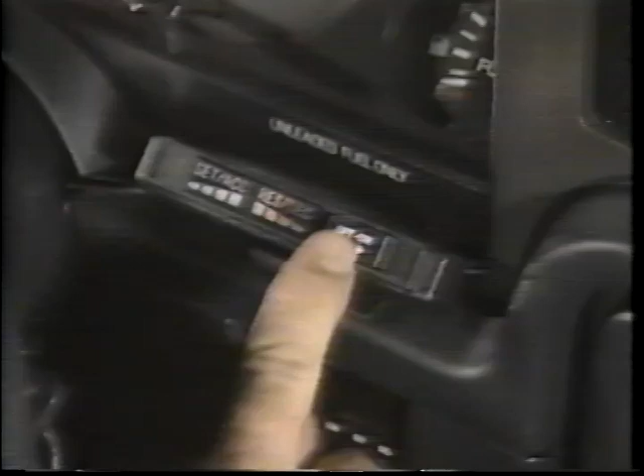The ZT-12 Cruise Control, an advanced system designed for driving comfort, convenience, and safety. This videotape will show you how the ZT-12 Cruise Control works and how to install and operate the system. Before we start the installation, let's take a look at how the system works.

The command module is the system control. It is designed to look and mount like original equipment. The command module turns the cruise control on and off, sets the cruise speed, and increases or decreases the speed setting. The command module also signals the system to resume speed after braking.

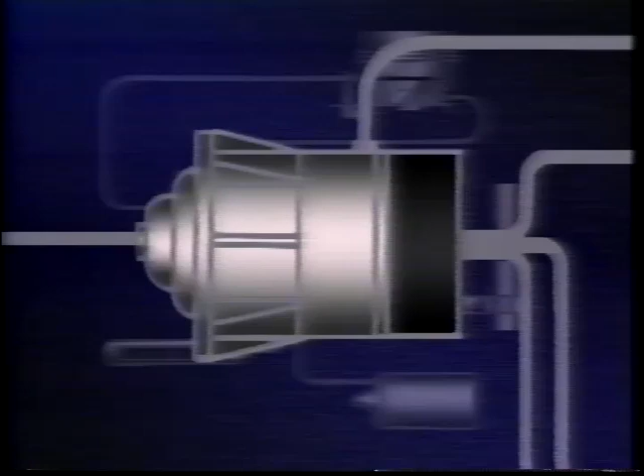The throttle actuator houses a specialized computer which monitors current road conditions. Twice every second, it analyzes speed conditions and adjusts the throttle to keep speed constant. The throttle actuator efficiently controls the carburetor settings by using vacuum from the intake manifold.

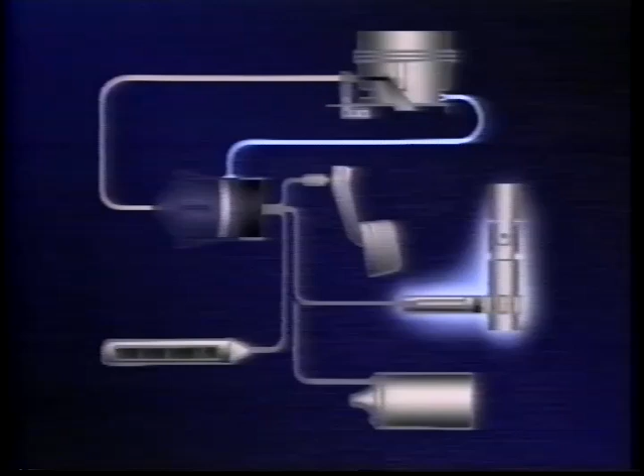The magnetic speed sensor constantly measures the vehicle's speed through the use of magnets attached to the drive shaft. The ignition speed sensor reads pulses from the ignition coil to calculate speed. This is optional on some models. The brake disengage safety feature shuts off the cruise control. When you want to disengage the system, simply tap the brake pedal.

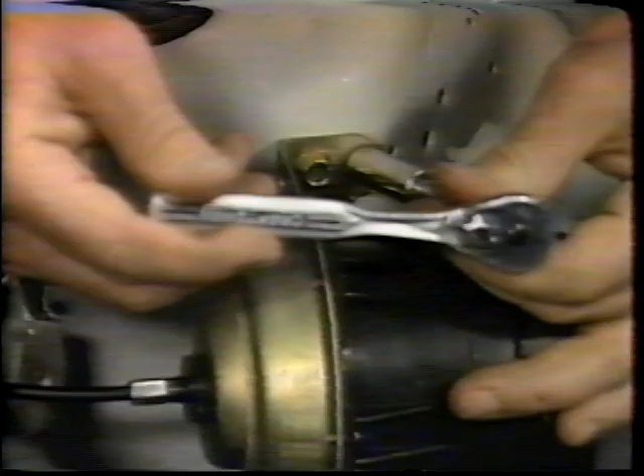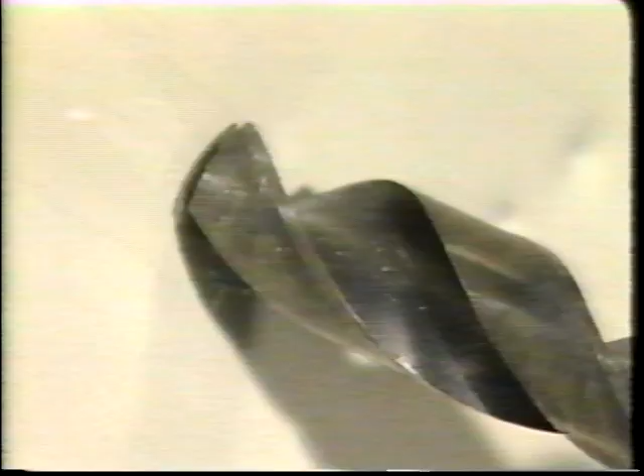Years of engineering and computer technology have made the Zemco ZT-12 Cruise Control extremely simple to install. This video installation guide has been created by Zemco to provide you with professional tips and to highlight key installation points.

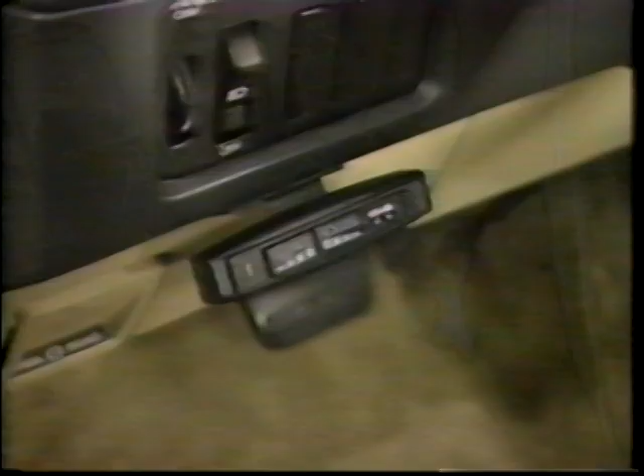The ZT-12 command module can be mounted on the turn signal arm end, piggybacked on the turn signal arm, or attached directly to either side of the steering column. The ZT-12 also has a unique design for convenient placement on the dash or console. The mounting stand is reversible, so you can attach the command module where it's best for you. All the necessary hardware is included.

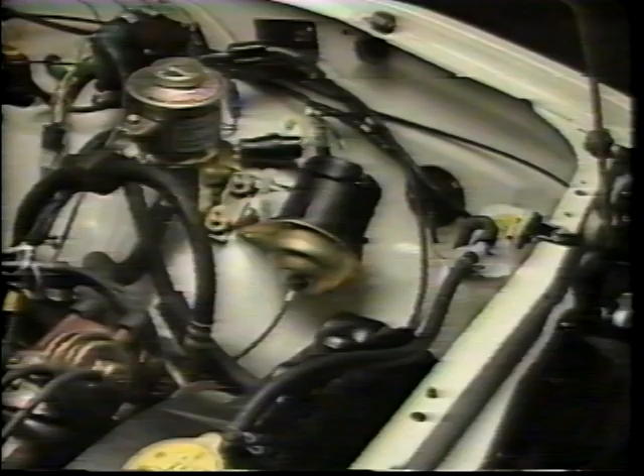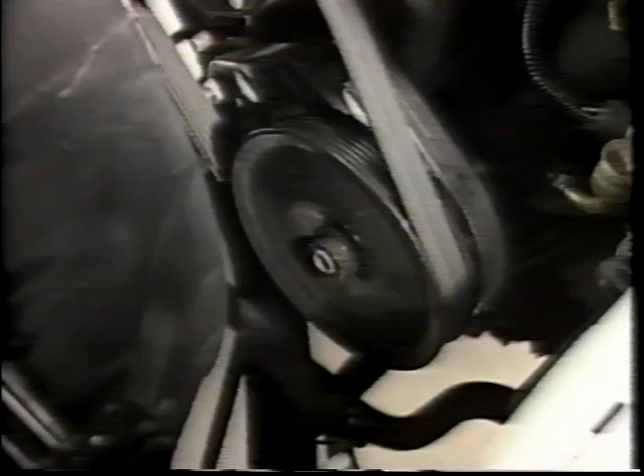The throttle actuator is usually mounted on the driver's side. The best places to mount the throttle actuator are on the inner fender, the strut housing, or shock tower. Avoid mounting the throttle actuator directly to the firewall because sometimes the normal operation of the actuator can be heard inside the passenger compartment. Stay away from pulleys and from excessive heat, taking special care not to mount the actuator near the exhaust manifold.

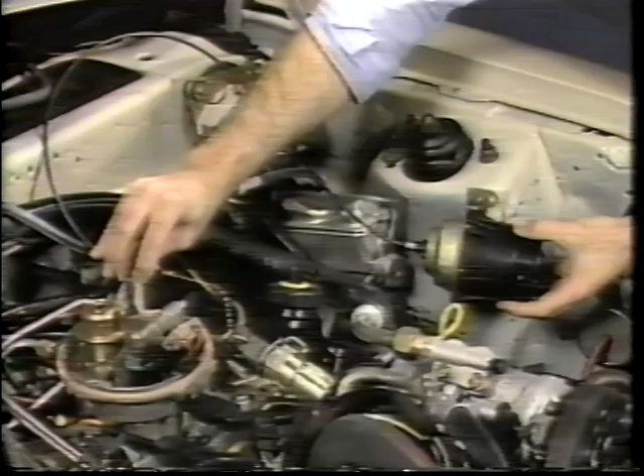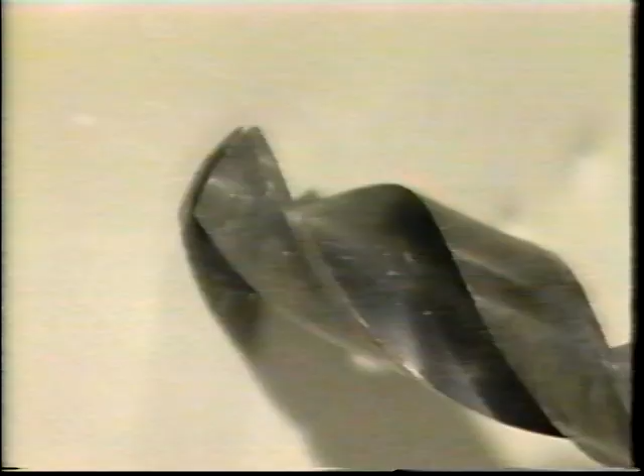Before you drill, make sure that the cable can reach the carburetor easily. The cable should have a gentle curve. If the bend is too severe, the cable may bind or lock up. When mounting, it is best to use 2 screws on opposing sides. However, if you have to mount on a rounded surface, 2 screws on the same side will work just fine. Check before you drill to be certain you aren't drilling into important hoses, wiring, or other components. Drill 3/16-inch holes and mount using the 1/4 by 3/4 inch sheet metal screws provided.

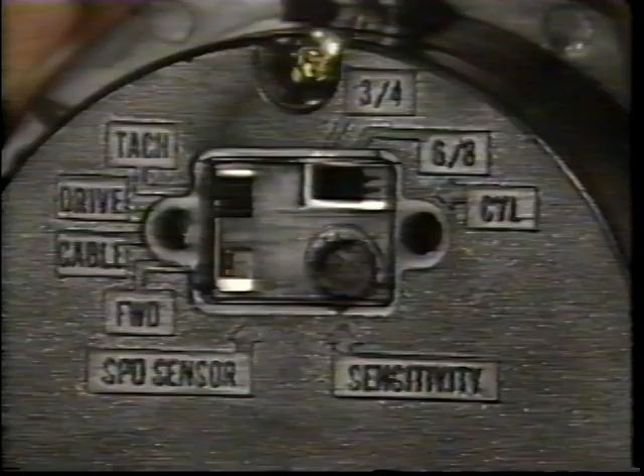The Zemco Cruise Control has been preset at the factory. However, some adjustments can be made on the back of the throttle actuator. If you have to mount the throttle actuator so the adjustments are in a hard-to-reach area, then leave it loosely mounted or unattached. After a road test and adjustment, it can be tightened down.

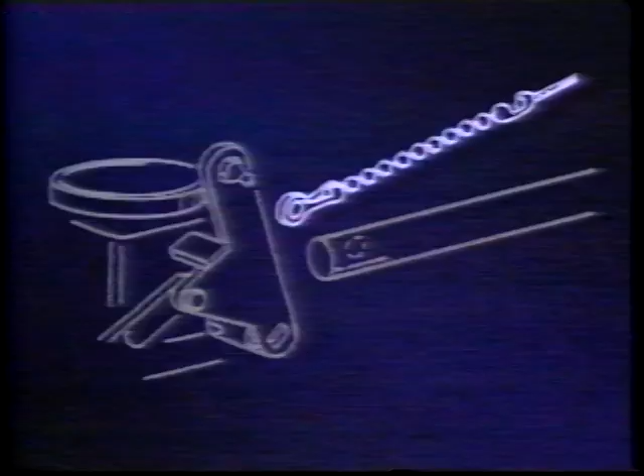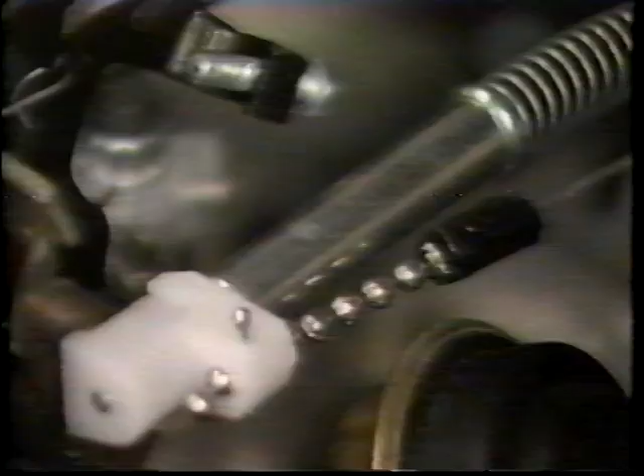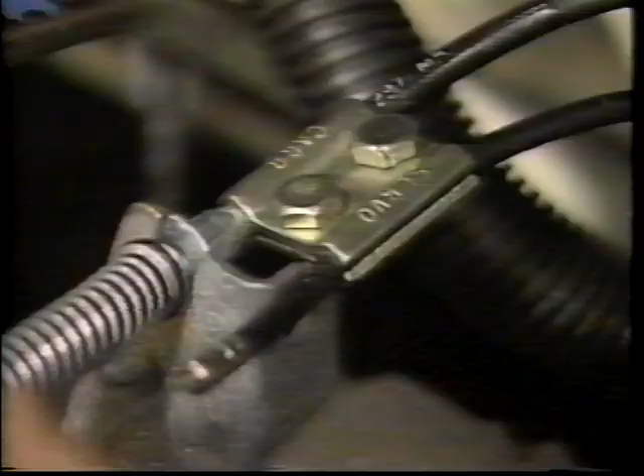There are many possible ways to attach the throttle actuator cable to the carburetor, but these basics always apply. When the cable is attached, the carburetor position needs to be at the hot idle setting. The bead chain must be tight, like this, not slack, like this. There can be no movement of the cable housing where it's anchored near the carburetor. If there is movement, you will lose the pulling action of the throttle actuator, and the cruise control may surge.

The cable must not rub against metal parts, otherwise it will fray or affect operation. The cable should pull on the throttle in a straight line, or at maximum, be within 20 degrees of the throttle pull. Be extremely careful about the cable getting bound up in the carburetor linkage. Watch the actual operation of the linkage several times. Double check this to be certain no binding can occur. If the carburetor linkage binds, it can be dangerous to you and your car.

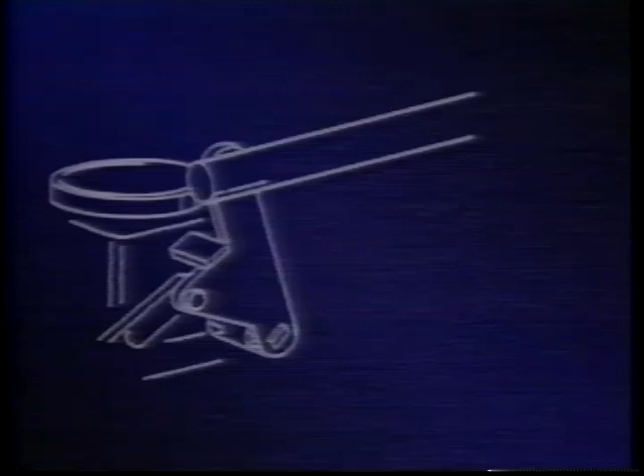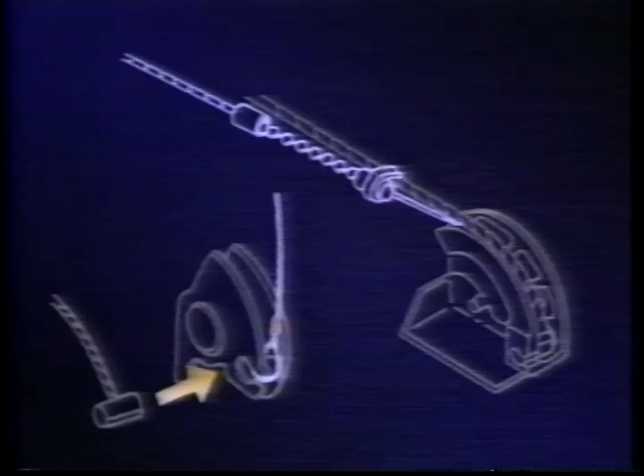There are various ways of hooking up the actuator cable to the carburetor. Here are some different examples. Snap-on throttle arm. Wire loop to carburetor pulley. Ford linkage adapter. 3-bead connector.

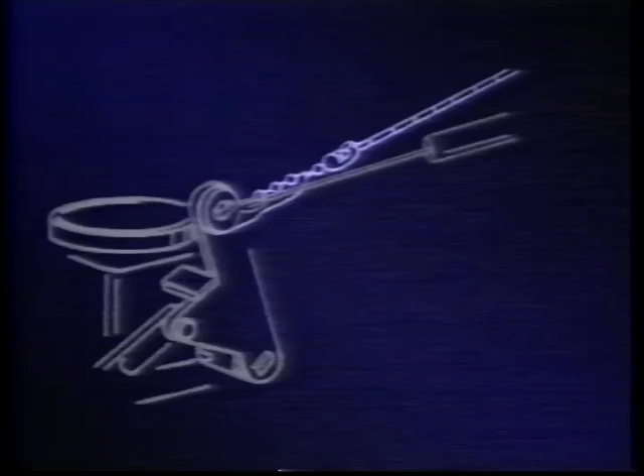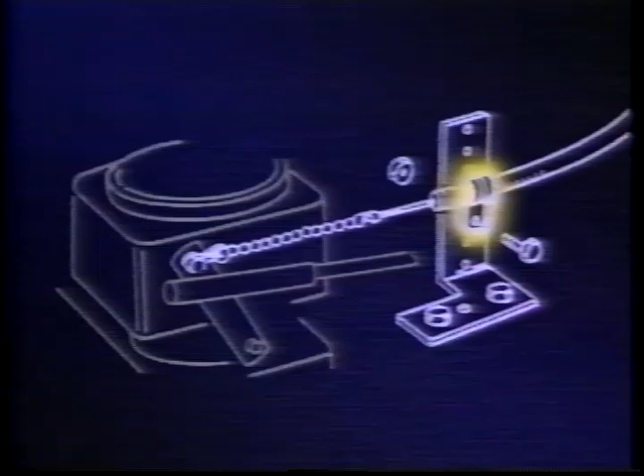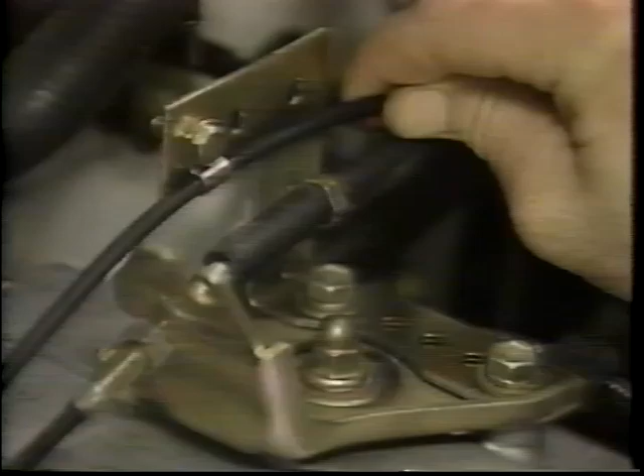If you're using the existing throttle cable housing to secure the actuator cable, then mount the actuator cable right next to the existing throttle cable's anchor point. Otherwise, you will lose pulling action. If you decide to use the P-clamp and L-mount bracket to secure the actuator cable, modify the L bracket as needed and mount securely. Check to see that there is no movement at the P-clamp and that the actuator cable can operate smoothly.

If it's difficult to attach the actuator cable to the carburetor, you can pull the actuator cable through the firewall and attach the cable directly to the top of the accelerator pedal.

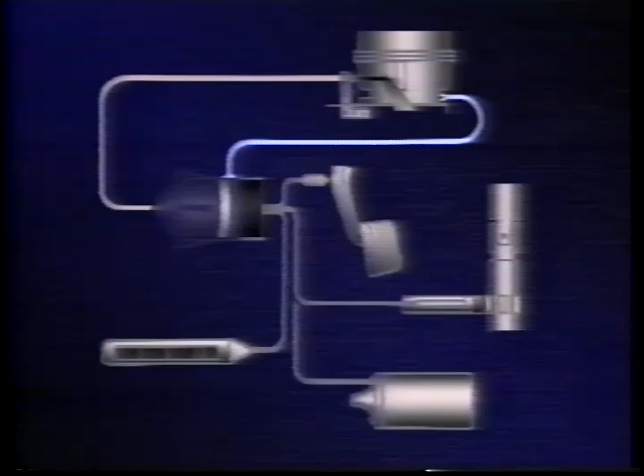In order to operate, the throttle actuator must have a constant vacuum source. Poor vacuum will cause poor performance. The best way to locate a constant vacuum is to go right to the intake manifold. Another method is to tap into the power brake booster hose between the engine and the check valve. The power brake booster hose usually comes right off of the intake manifold.

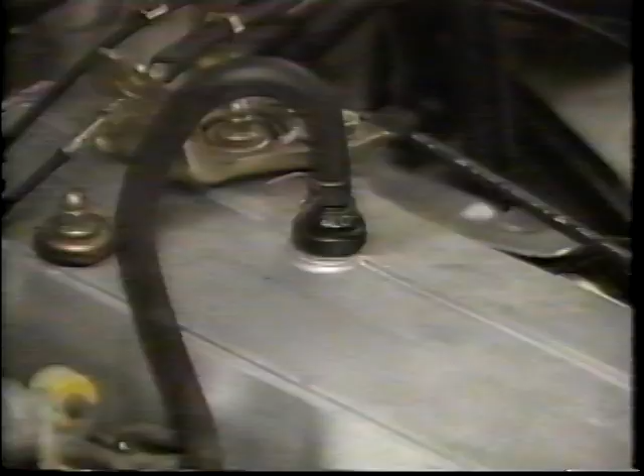In some cases, you'll find a junction block coming off the intake manifold where the power brake line is connected. That is a good source as well. When connecting the vacuum hose, stay away from PCV valves, multiple ported vacuum switches, smog control devices. These do not have a constant vacuum source. Without constant vacuum, there won't be constant pull from the actuator to the carburetor, and you cannot maintain constant speed.

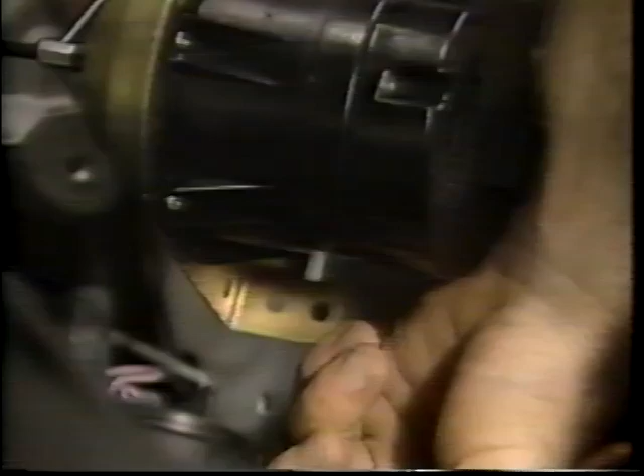Once you find the right hose, cut it and install the correct size vacuum T supplied. Connect it to the throttle actuator. If you have a diesel, make sure your car has an auxiliary vacuum pump. There are several different types of speed sensing which can be selected according to the type of transmission and vehicle you have.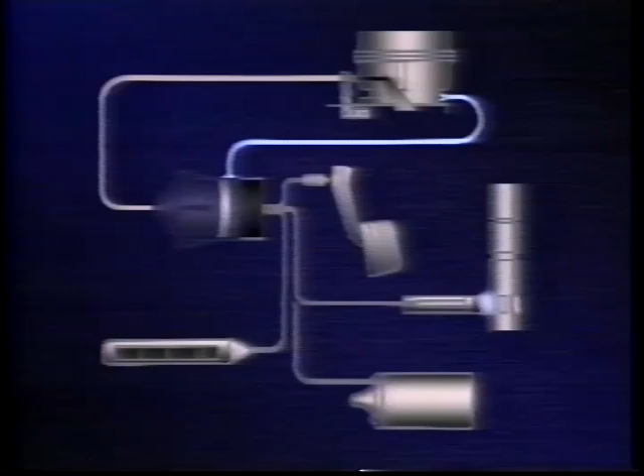Ignition coil speed sensing is the easiest to install and should always be used on cars with manual transmissions. This speed sensing method uses pulses from the ignition coil to send speed information back to the computer. Magnetic speed sensing uses magnets that are attached directly to the drive shaft or half shaft for front-wheel drive. As the shaft turns, the magnets generate pulses at the speed sensor, which sends speed information back to the computer. If your car has an automatic transmission or a diesel engine, you will need to use magnetic speed sensing.

There is an alternative method to magnetic speed sensing. It's called a speed pulse generator. It uses the speedometer cable to generate speed sensing information. The speed pulse generator can be purchased as an option for your cruise control. Just contact your dealer or Zemco.

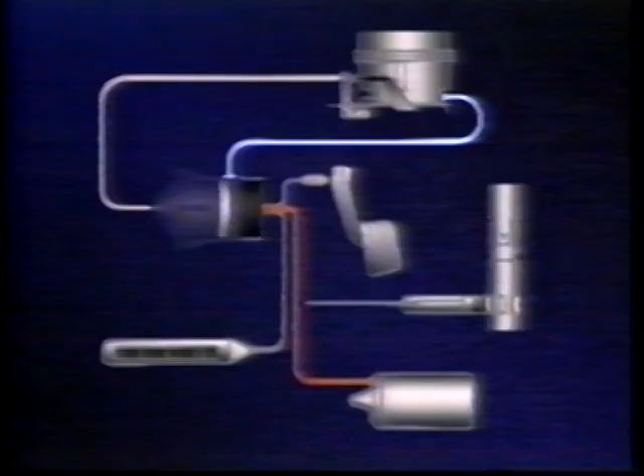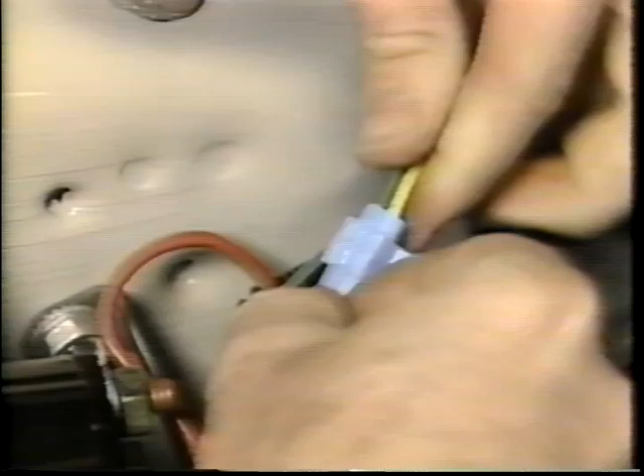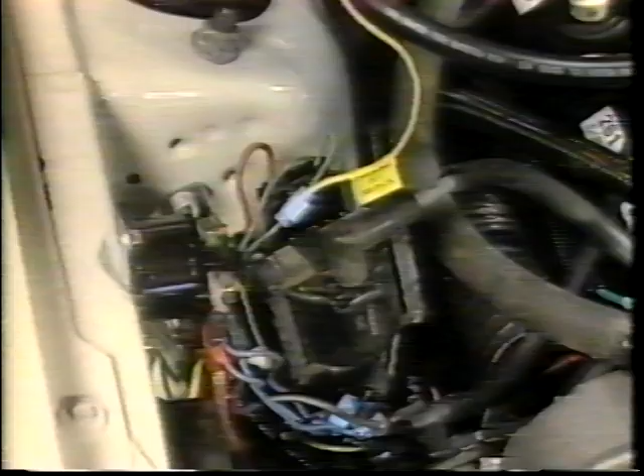First, let's look at ignition coil speed sensing. On manual transmissions, attach the yellow wire from the wire harness to the negative side of the coil, usually labeled negative or tach. If it isn't labeled, find a source that would operate a tachometer or RPM meter. An added safety feature of ignition coil speed sensing is ECS, electronic clutch switch, which protects the engine from over-revving by disengaging the cruise control if the clutch is depressed. This is standard protection on the ZT-12.

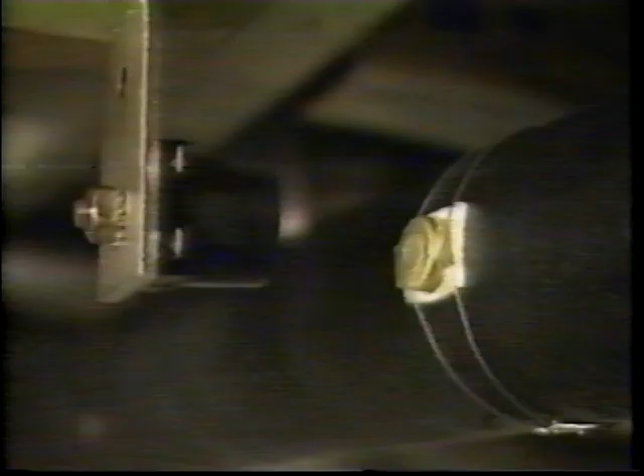If your car has an automatic transmission or a diesel engine, you will need to install the magnetic speed sensor. Before working under your car, always place your car on level ground. Apply the parking brake. Block the opposing wheels. Follow your vehicle owner's manual for proper jacking procedure, and use 2 jack stands. Never, under any circumstances, use the jack alone to support your car while working underneath.

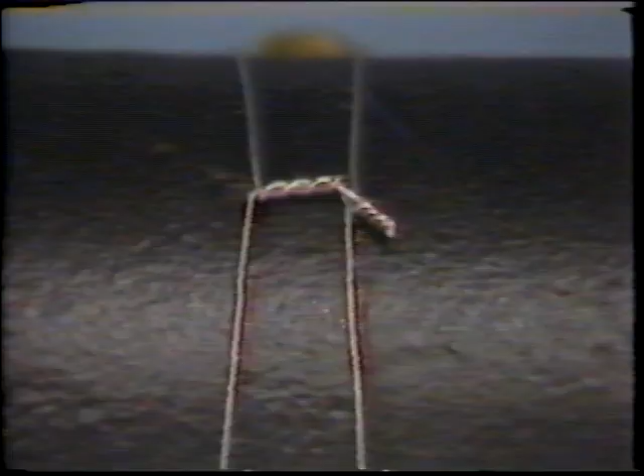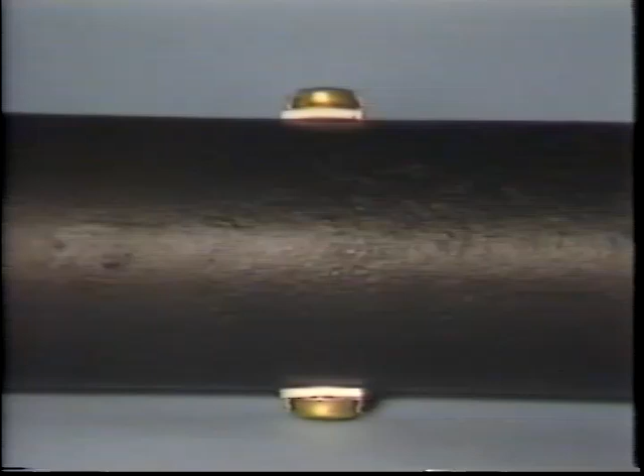Before placing the magnets on the drive shaft, make sure there is enough space to install the speed coil bracket. Place the magnets opposite each other using double stick tape. Next, wrap the magnets with 2 strands of wire and twist the ends together with a pair of pliers. To ensure a permanent mount, twist the wire ends around the opposite wire to take out the slack. Never use tape alone, since heat and centrifugal force will throw the magnets off the drive shaft.

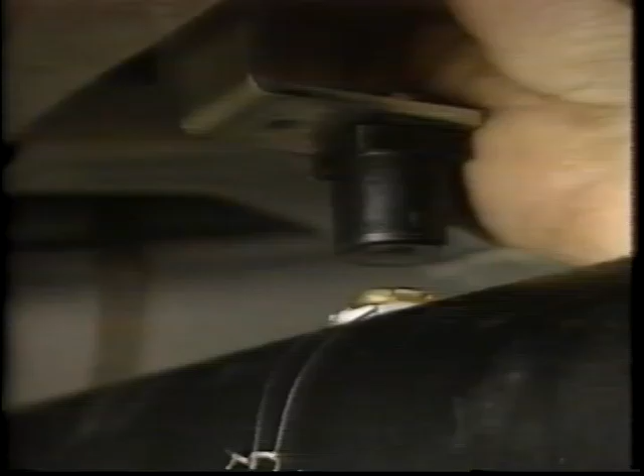On rear-wheel drive, position the magnets within 12 inches of the front U-joint. Use 2 magnets. The speed coil should be positioned to the side, not from the top or from the bottom, because the drive shaft will move up and down. On any car, the distance between the magnet and the speed coil should not exceed 3/8 of an inch. This distance is important for proper cruise control performance.

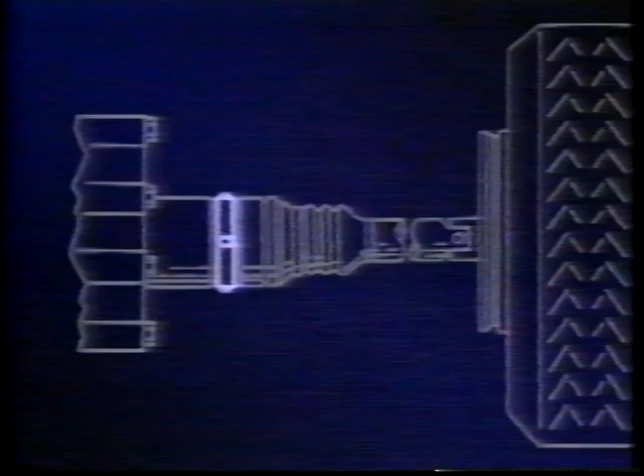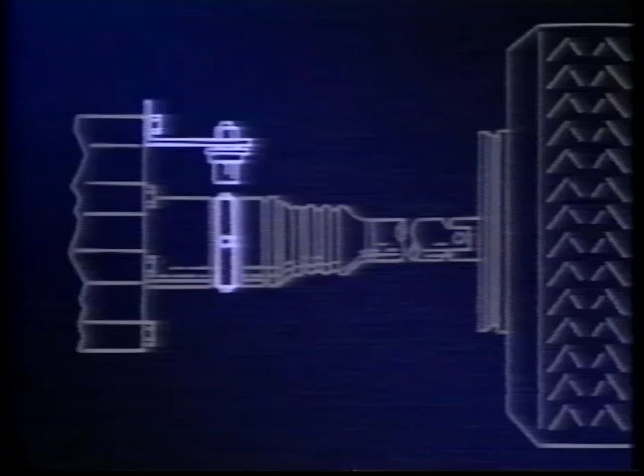On front-wheel drive, position the magnets as close to the transaxle as possible, usually on the hub, leaving enough space to install the speed coil bracket. Use 4 magnets. If necessary because of axle design, 3 magnets can be used. Since the transaxle does not move up and down on front-wheel drive, you can mount the speed coil bracket on top or to the side. Mount the speed coil securely so it doesn't vibrate or move around, because that can cause speed fluctuations and unsatisfactory performance.

Before drilling holes for the speed sensor bracket, again, look and find out what you might be drilling into. Use the 1/4 by 3/4 inch sheet metal screws provided. Here is the wiring harness connection procedure, step by step. Before you start, make sure your ignition key is in the off position. Connect the wire harness to the rear of the throttle actuator.

Connect the green ground wire to the car body or chassis, making sure there is no paint in between the connection. Another good ground point is the negative side of the battery. Check your connection, because a bad ground can cause erratic operation. If you've decided to use ignition speed sensing, attach the yellow wire to the negative or tach side of the ignition coil. Tie the black wire pair out of the way, since it is used only for magnetic speed sensing.

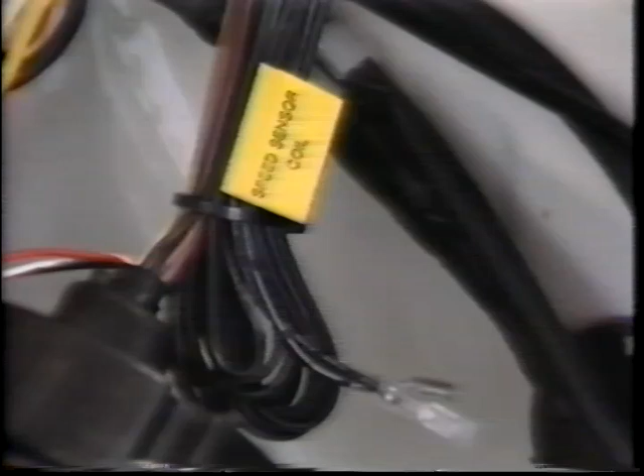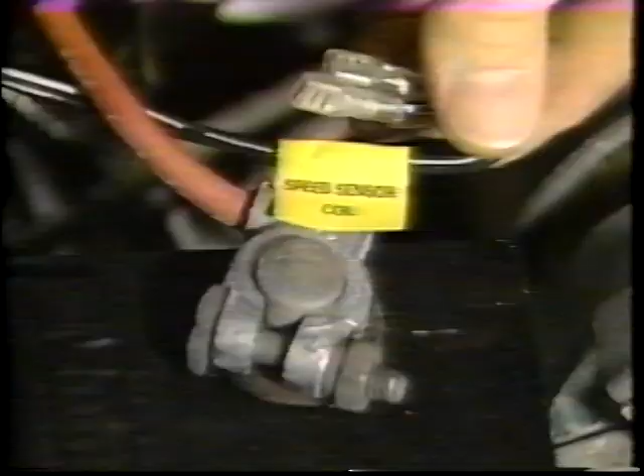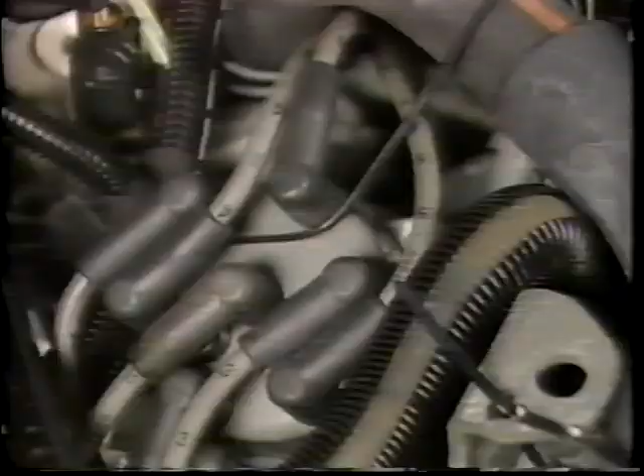If you're using magnetic speed sensing, run the black wire pair to the magnetic speed sensor, staying at least 8 inches away from battery cables, coil wires, or spark plug wires. Electrical interference can be picked up through these black speed sensor wires and cause the cruise control to surge. The black wire pair can be connected to either terminal of the magnetic speed sensor.

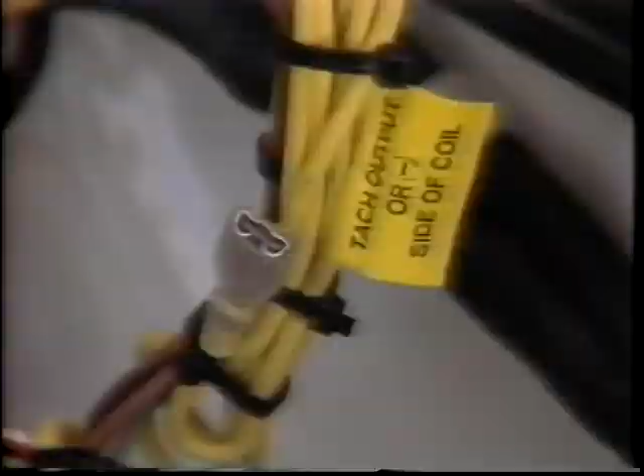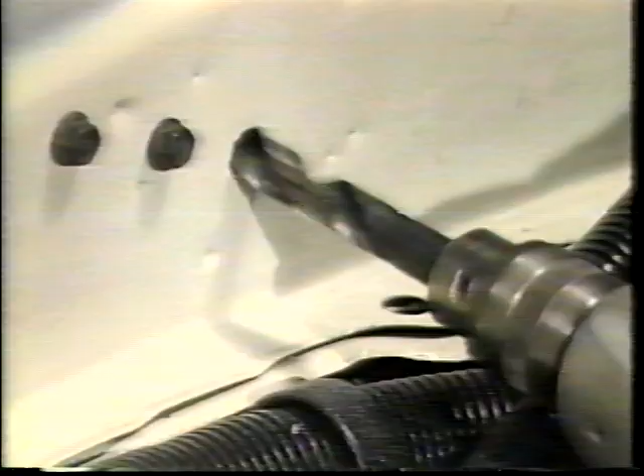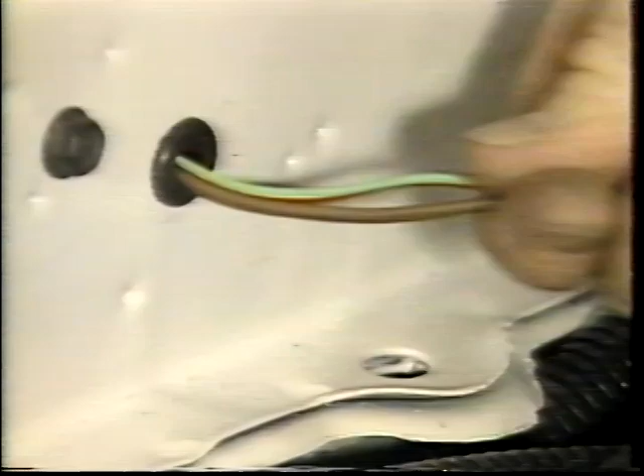Tie the yellow wire out of the way, since it is used only for ignition speed sensing. Find a hole in the firewall, like the speedometer cable hole, and route the command module wires and the brown brake light switch wires into the passenger compartment. Or drill a 1/2 inch hole in the firewall, install the rubber grommet provided, and then route the wires into the passenger compartment. The grommet is important because it protects the wires from being cut or damaged.

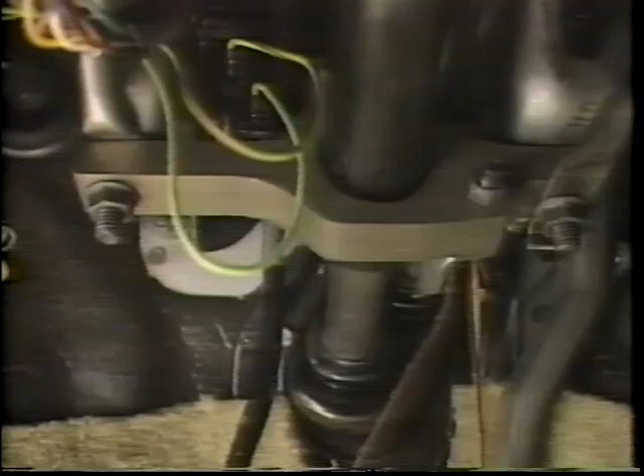Next, run the 2 brown wires to the existing vehicle brake light switch. There may be more than 2 wires coming out of the brake light switch, but we're looking for 2 specific wires. One wire that has a constant 12 volts, and another wire that will have 12 volts only when you press the brake pedal. When you press the brake pedal, the brake light switch turns on the brake lights. Again, we're looking for 12 volts constant and 12 volts when the brake is pressed. Once you find these 2 connection points, it does not matter in which direction the brown wires are attached.

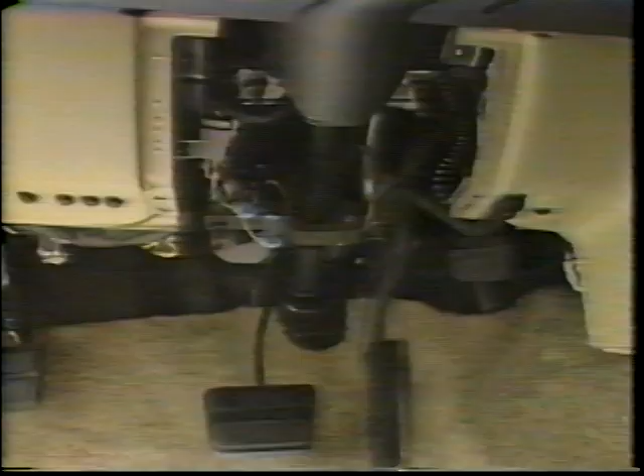Use Scotch locks to connect the brown wires to the brake light switch wires. Use sufficient pressure with the pliers when crimping the Scotch locks to ensure a good connection. If the brake light switch wires are not installed properly, the cruise control will not work. This is an important safety feature, and this step should be performed with extra care.

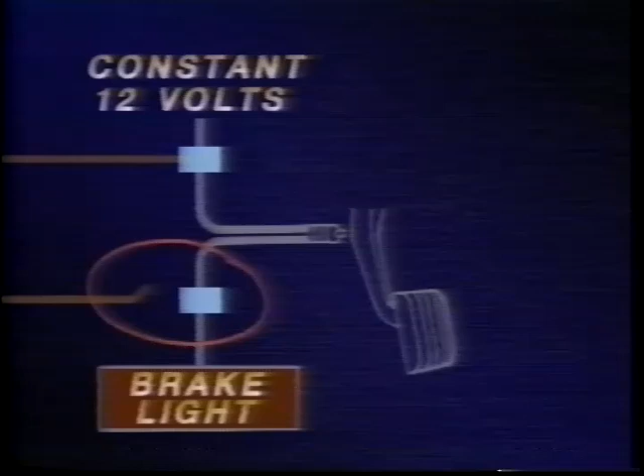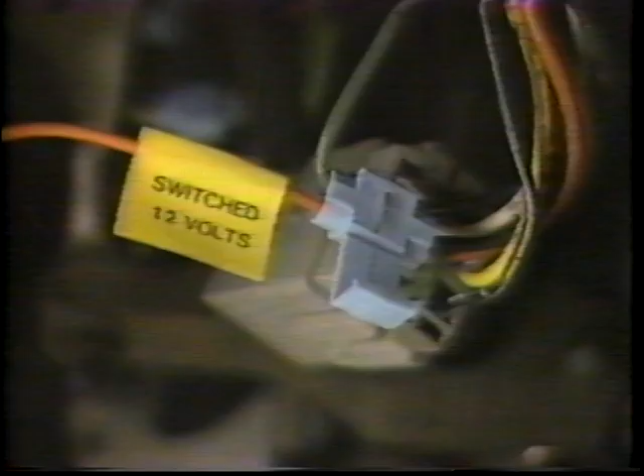The next step is to locate a switched 12-volt source. By switched, we mean that you will have 12 volts only when the ignition key is in the on position. A good place to start is the fuse box. Follow the wiring coming out of the fuse box and locate a switched 12-volt source with a test light. To check your source, turn the key on and off. If the test light goes on and off, that is the 12-volt source. Connect the orange wire to the switched 12-volt source by using a Scotch lock.

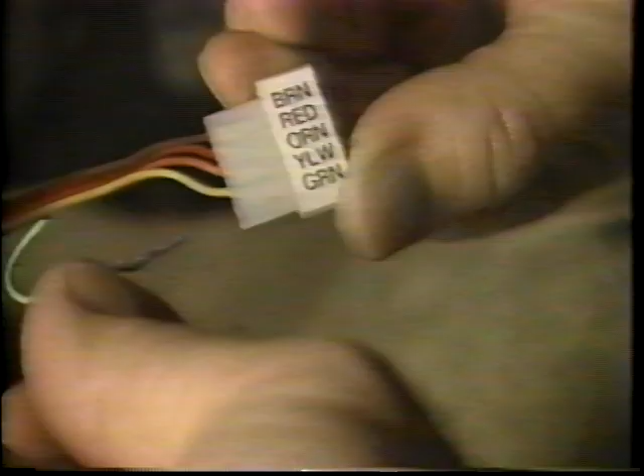Before connecting the wire harness, make sure the key is off. Match and insert the colored wires from the command module into the 5-pin connector. Match and insert the colored wires from the wire harness into the 5-pin connector that has the orange wire already connected. Plug the 2 connectors together. You have now finished the initial installation, but take a moment to go back and check each of the connections and the parts which you've installed. If everything looks okay, then it's time to set some adjustments and then road test.

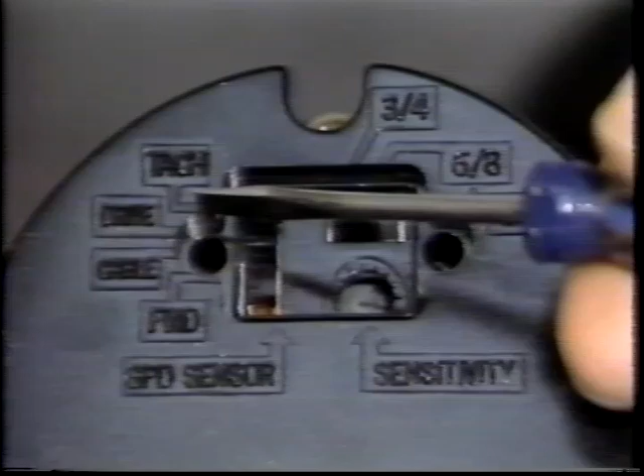Before you road test, you'll need to set some adjustments on the back of the throttle actuator. Make the adjustments only when the key is off. First, find the speed sensor switch and set to TACH for ignition coil speed sensing, drive if magnets were installed on the drive shaft, cable if you've installed a speed pulse generator, or FWD for front-wheel drive applications with magnets only. If your car has 3 or 4 cylinders, slide the switch to the 3-4 position. If your car has 5, 6, or 8 cylinders, slide the switch to the 6-8 position. Use the operations guide card to learn how your new cruise control works.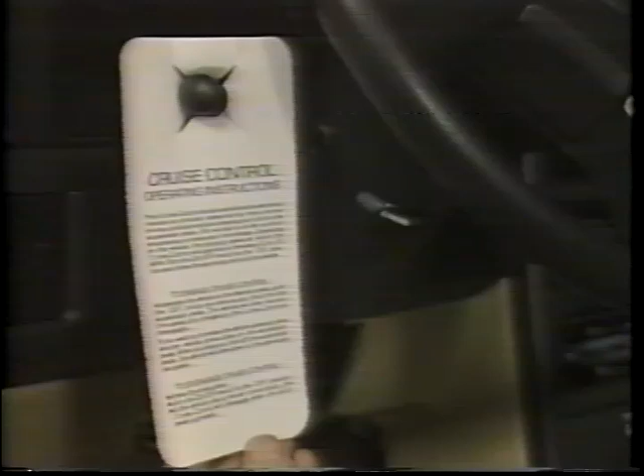It's time for a road test. First, turn the cruise control on. Then bring the car up to cruising speed. At 50 miles per hour, we'll set speed. You can see that the cruise control is holding steady. To increase your speed, hold in the Set Accel button. Let off and it will set.

In addition to the constant accel, we can also tap up 1 mile per hour with each tap. To decel, we can tap down 1 mile per hour or disengage the cruise control through the brake. After braking, you can return to your former speed by pressing Resume. To coast, turn the cruise control off. To return to your cruising speed, turn the cruise control back on and push Resume.

Your Zemco Cruise Control has been factory preset for optimum performance. We find that further adjustment is often not necessary. However, if you do need further adjustment, first double check that there is no slack in the bead chain and that the throttle actuator cable has a secure anchor point. Next, check for correct vacuum. If the bead chain and the vacuum are correct, you may have to adjust the sensitivity.

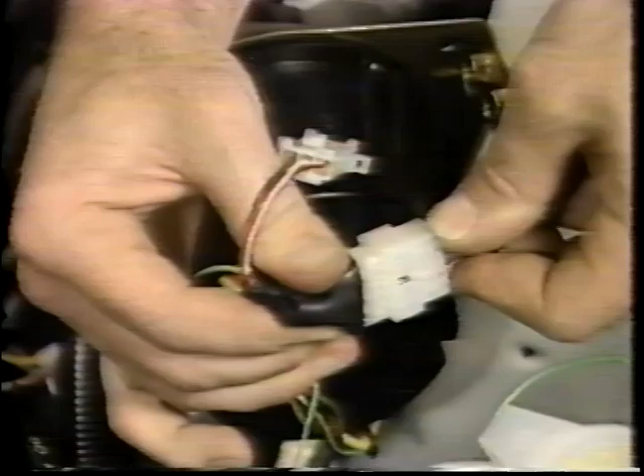There is a field tester that will test the cruise control in the vehicle. Just disconnect the wire harness at the back of the throttle actuator and plug it into the tester. The tester can quickly and easily identify potential problems with the installation. Check with your dealer or contact Zemco's Technical Services Department for tester availability.

Have fun with your installation and enjoy the economy of operation, drivability, and convenience that only a Zemco Cruise Control can give.